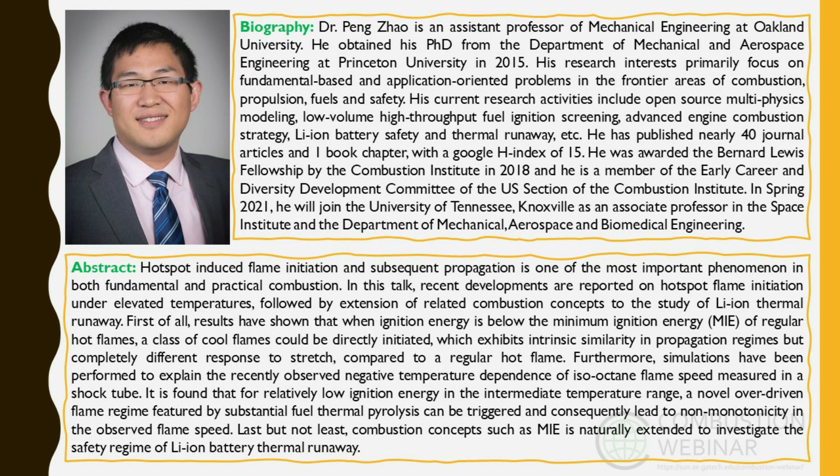So I always consider Peng as a rising star in our field and also a role model. In spring 2021, and this is good news for us, he will join the University of Tennessee, Knoxville as an associate professor in the Space Institute and the Department of Mechanical, Aerospace and Biomedical Engineering. So Peng will move and also be promoted. That's very good. And I think because of this Space Institute, he will add more research towards the aerospace direction. So let's see what Peng has for us today.

Okay, thank you very much, Dr. Yang, for the kind introduction. Dear colleagues and friends, it's really a great pleasure for me to introduce to you my recent research on hotspot flame initiation, as well as lithium-ion battery thermal runaway. In the beginning, I want to give a brief introduction saying why this problem is important and what are the fundamental concepts I want to briefly review.

Basically, in power cycles and propulsion systems, combustion frequently needs to be triggered at the desired timing of each cycle. Such active combustion control is frequently realized using the spark plug or the laser ignition system. During this process, you will have the ignition energy stored in the ignition coil or the laser pulse deposited locally in a short duration of time, leading to subsequent thermal and chemical change in the mixture. And in other cases, due to the heat transfer with a wall or imperfect mixing, pre-ignition knock may occur due to ignition from a hotspot.

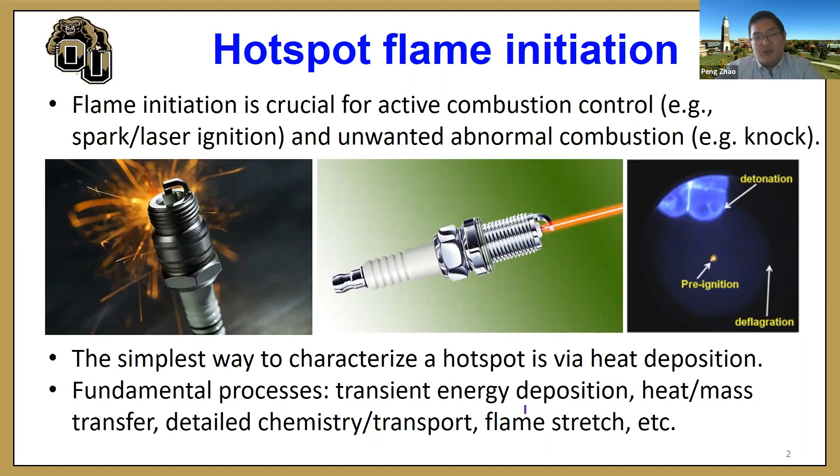So a very simple way to model this class of phenomena is through the problem of hotspot ignition, where a hotspot is characterized by the heat deposition by imposing a heat source term or an initial temperature profile. Although complexities such as electromagnetic waves, shock waves and plasma ionization are sometimes ignored, the crucial fundamental processes, including the transient energy deposition, heat and mass transfer, detailed chemistry, transport, and flame stretch are accounted for.

On the other hand, as reviewed in the lecture from Professor Egolfopoulos a couple of weeks ago, by surveying hundreds of recent combustion literatures, he found that the majority of laboratory flame experiments are conducted under ambient or only slightly elevated temperatures. However, in practical systems such as piston engines, gas turbines, and scramjet engines, you have the unburned mixture being compressed by either the piston motion, flame dynamics, the compressor, or a sequence of shock waves, such that there's a substantial mismatch in the thermodynamic conditions of the unburned mixture.

So that will lead to gaps in understanding of flame dynamics and chemistry, and that will lead to missing novel physics and combustion features. So that's why I want to talk about flame initiation problems under elevated temperature conditions.

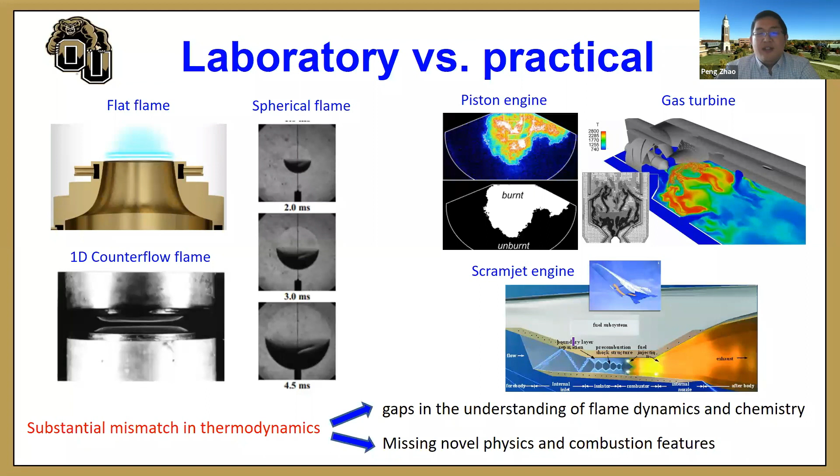So before I continue, I want to review two major important concepts for the hotspot ignition problem. The first one is minimum ignition energy, which measures the critical ignition energy needed to successfully trigger a self-sustained flame. The left-hand side shows experimental data on n-butane/air. You can see that when the ignition energy is low, the flame kernel basically cannot be initiated. With gradually increasing ignition energy, we can successfully initiate a flame.

And the right-hand side is a simulation on hydrogen-oxygen mixtures, which basically shows the same thing. There exists a critical ignition energy above which you can successfully trigger a flame. So there are many analytical solutions and even scaling laws on the minimum ignition energy in the textbooks and literature.

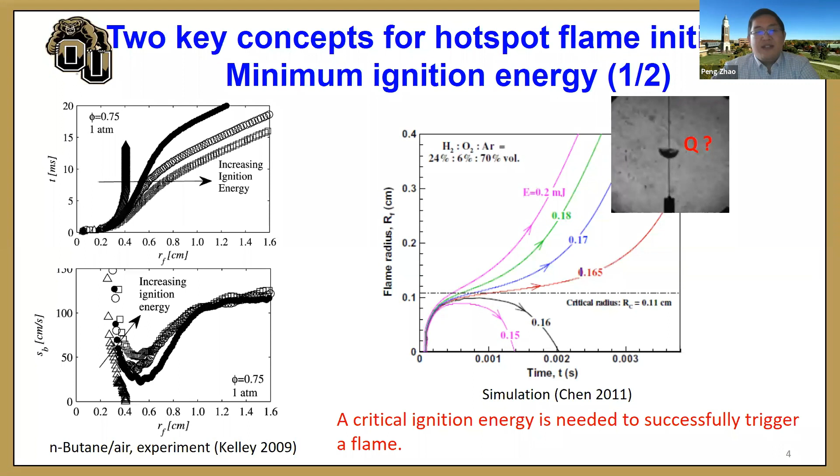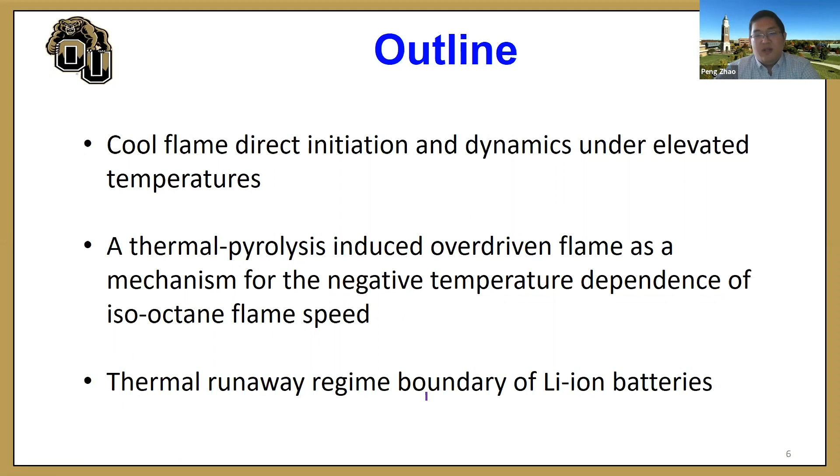So with these 2 fundamental concepts in mind, I'm going to show the outline of today's talk. The first story I'm going to talk about is cool flame direct initiation. The focus is on the minimum ignition energy and flame regimes, as well as the stretch dependence of cool flames. The second focuses on the recently observed negative temperature dependence of iso-octane flame speed under high temperatures as measured in a shock tube at Stanford. And by performing unsteady simulations, we can explain that negative temperature dependence by observing a thermal pyrolysis induced overdriven flame. In the third part, I'm going to show how I extended the hotspot ignition phenomena and concepts to the study of the thermal runaway ignition regime of lithium-ion batteries.

So the first part, cool flame direct initiation. The simulation is performed using an open source reacting flow platform based on OpenFOAM. And the fuel we select is dimethyl ether, one of the simplest fuels including low temperature kinetics. Under ambient temperature 300 Kelvin and 1 atm, the flame initiation process is largely similar to the hydrogen case we have just shown. You have either a successful initiation of a hot flame or an ignition failure.

However, when we increase the ambient temperature from 300 Kelvin to 600 Kelvin, although we can still have a hot flame at a very large ignition energy and ignition failure at low ignition energy, in between there is a range of ignition energy which gives you a cool flame, with a much milder flame radius evolution rate.

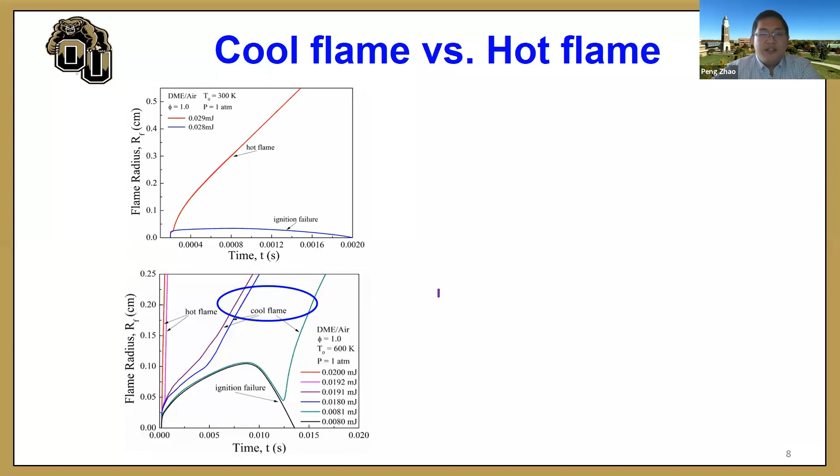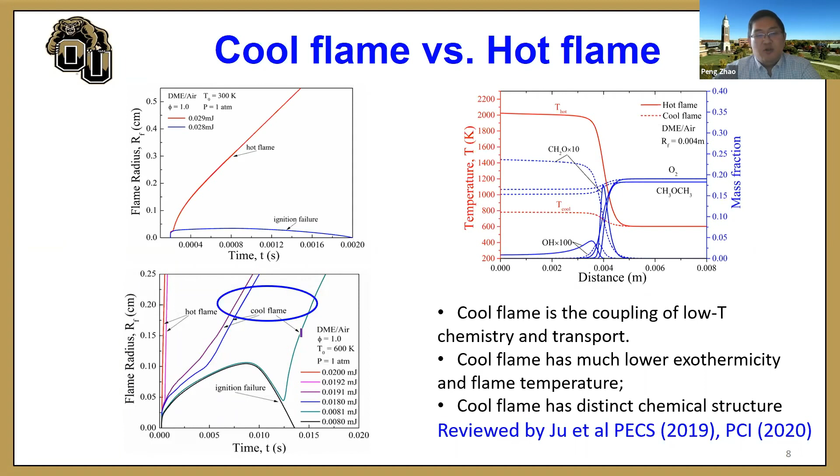So if we trace the minimum ignition energy needed to initiate a cool flame, we find that the cool flame can only be initiated in this low to intermediate temperature peninsula, and the cool flame can be initiated with a much lower ignition energy compared with a hot flame for the same mixture. Also, a cool flame can be initiated over a much wider equivalence ratio range. This is consistent with the extended flammability limits of cool flames as identified by Liang and Law using the turning point of premixed flames.

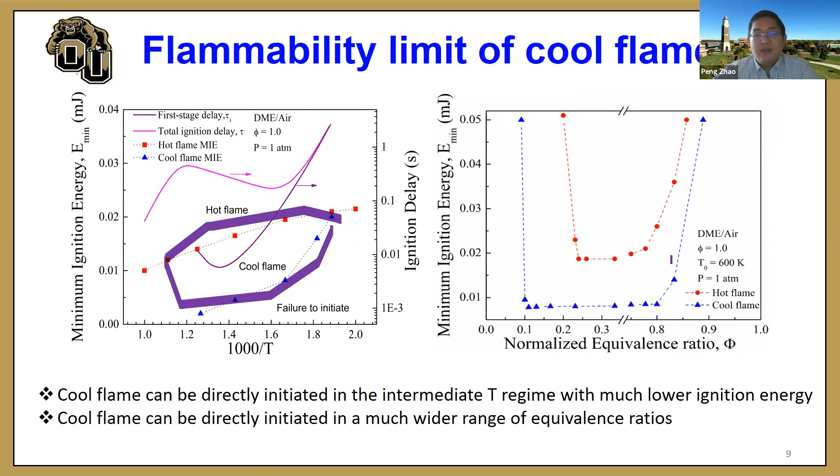Although with the similarities in the flame initiation regimes, there is a substantial difference in the cool and hot flame response to stretch. So following the classical theory of stretched flames, the flame stretch induced by flow non-uniformity and flame curvature will couple with a non-equal diffusion of heat and chemical species, basically manifested as non-unity Lewis number. And this coupled effect of flame stretch and Lewis number can affect the burning intensity of the flame.

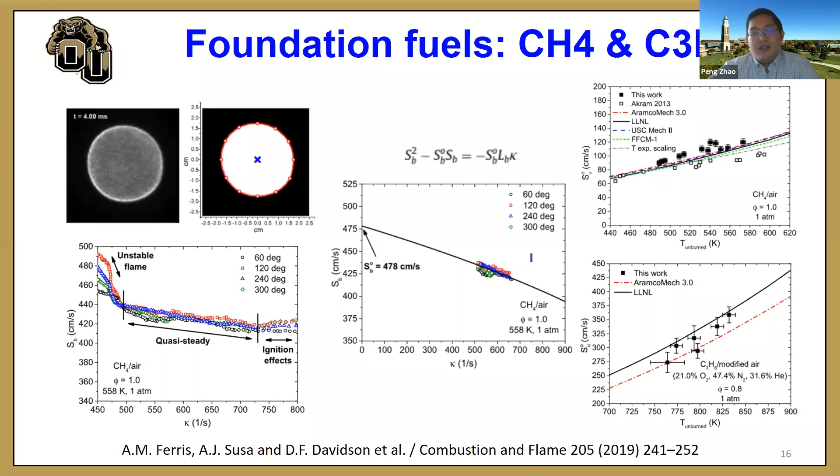However, in the intermediate temperature range around 750 kelvins, they have found a negative temperature dependence. Well, one direct conjecture might be, okay, this is similar to the NTC effect in the ignition process, where the ignition delay shows the NTC behavior.

But if you compare the ignition timing versus the flame measurement time, you can find that the ignition delay, even the first stage ignition delay, is at least 2 orders of magnitude higher compared with the flame measurement time. What it means is that during the flame propagation time, the unburned mixture is hardly affected by any auto-ignition chemical reaction progress. Or in other words, it's chemically frozen.

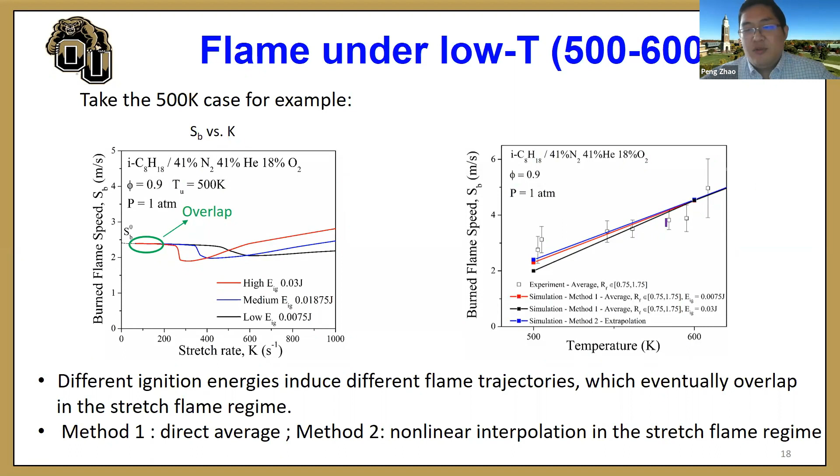Similar things happen for the high temperature conditions, where regardless of ignition energy, regardless of method 1 or method 2, you have pretty consistent results and good agreement with the experiment.

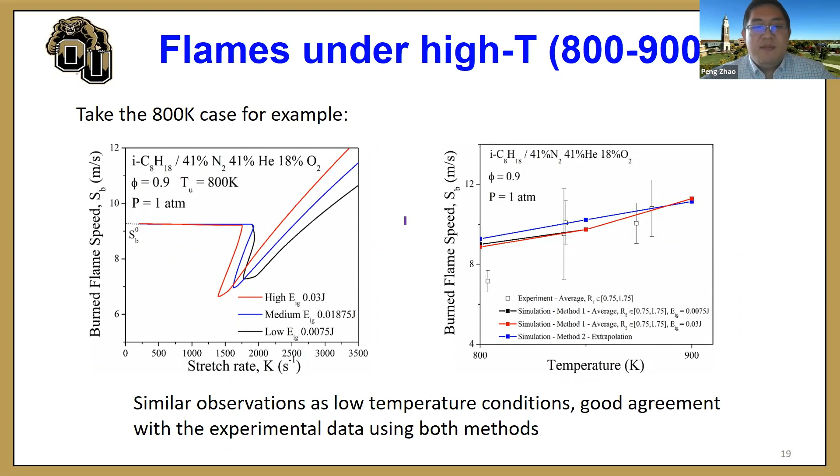The strange thing occurs in the intermediate temperature range, where with a high ignition energy case, the evolution process is pretty normal. However, with a low and a medium ignition energy, you will see a sudden flame acceleration in the beginning. That leads to a huge bump in the flame speed, which decays back to the regular stretch flame dynamics regime and merges with a regular flame structure in a while. And eventually, all these flame branches merge in a stretch flame dynamics regime as expected.

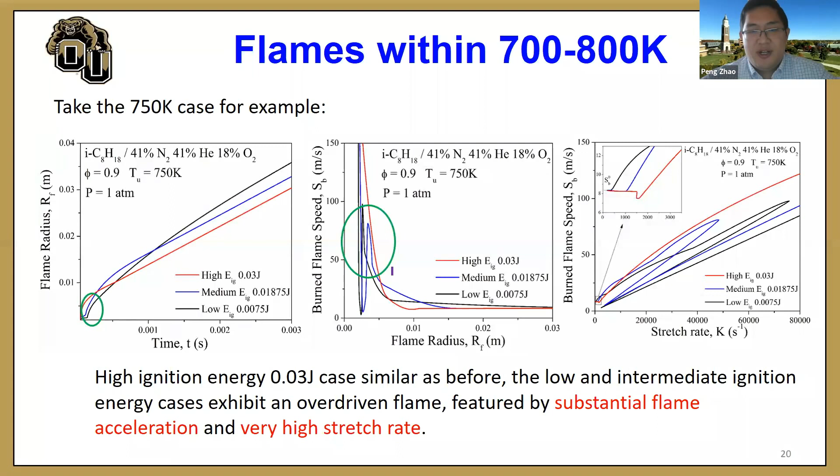However, this overdriven flame segment during the flame initiation process will affect the result if you directly average the flame speed in a certain radius range. So as shown here, if you use method 1, still averaging the flame speed within 0.75 to 1.75 centimeter using a low ignition energy, you can successfully capture the NTC, the negative temperature dependence of the flame speed.

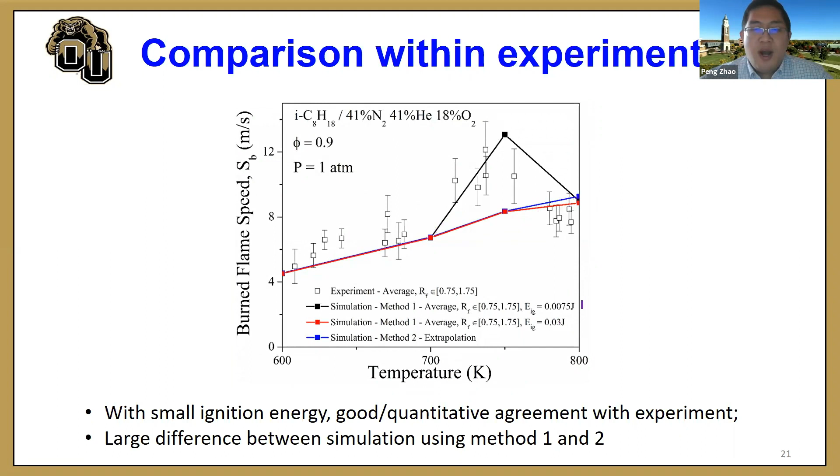However, if you use method 1 but with a higher ignition energy case, since there is no overdriven flame, the trend exhibited in the experiment is not captured. Right? And similar thing for the extrapolation, we can only have monotonicity in the flame speed. So next question is, what is this overdriven flame? What causes this overdriven flame?

That implies this is a thermal pyrolysis or thermal decomposition process, which subsequently generates a lot of C1 to C4 fragments. And these C1 to C4 fragments at a certain point tend to autoignite, leading to a much steeper reaction region with a much steeper temperature gradient. And this is the flame of the CO and C1 to C4 fragments, which tends to propagate faster and swallows the milder reaction zone segment controlled by fuel pyrolysis.

And this flame structure, of course, is unstable because this segment propagates much faster, and eventually it will take a few moments to approach the regular flame structure. And that causes the overdriven flame.

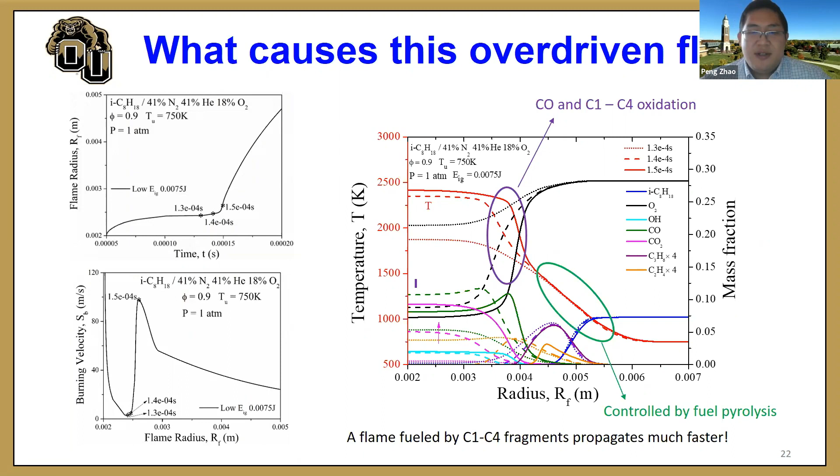And at higher temperature conditions, although your fuel pyrolysis is favored, your flame initiation is much easier and much faster. So therefore, there's no sufficient time allowed for this overdriven flame to occur. More detailed results of this work are reported in our collaboration with Professor Chen from Peking University and Professor Hanson from Stanford in this Combustion and Flame paper.

And this work, to summarize it, we have performed time scale and chemistry analysis to show that the observed non-monotonic behavior of high temperature iso-octane flame propagation is irrelevant to the low temperature chemical kinetics and autoignition chemistry. And we also found that in the intermediate temperature range with lower ignition energy, we can actually have a fuel pyrolysis induced overdriven flame, and such an overdriven flame can well describe the negative temperature dependence of the experiment.

So in the third part, I want to talk about how we, as combustion scientists, can extend the phenomena and the concepts of flame initiation to study lithium-ion battery thermal runaway. Because in recent years, I receive more and more questions from my students: as we major in combustion, do we have a future if the future ground transportation is full electric?

So I told them the answer is yes, because there are lots of challenges even in battery research, and some of the challenges require a solution from the combustion community. So when I say challenges, it actually means opportunities. I think there are at least 4 different challenges of battery research.

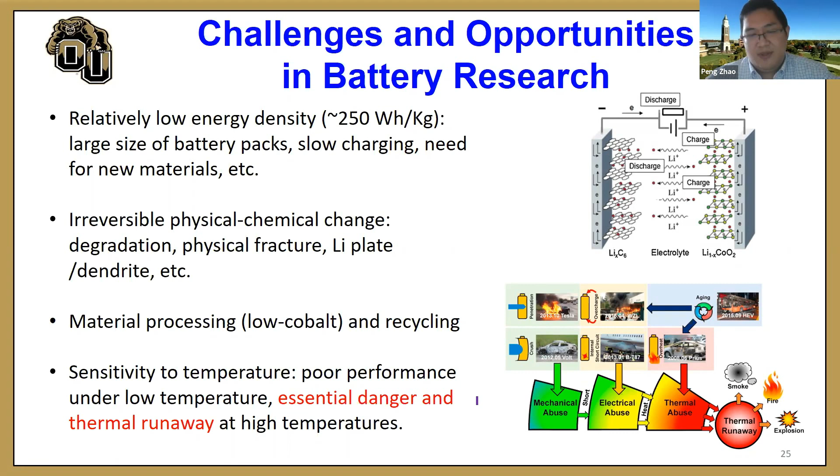And this is a part that I think as a combustion community we can contribute. I would consider this a combustion problem. As reviewed in this table, you can see that most electric vehicle or plane accidents are actually caused by internal short circuit or external short circuit of lithium-ion batteries. And what happens in such a process is basically the short circuit tends to create a hotspot within a battery pack. That hotspot tends to trigger some unwanted reactions on the battery material, including the electrode and the electrolyte. Right?

So as inspired by hotspot ignition from combustion research, I'm going to raise 2 questions. The first question is, what is the threshold condition and the kinetic feature of thermal runaway? Second question, during a typical internal short circuit scenario, what is the heat release rate? Is that going to satisfy that critical condition for thermal runaway?

All right. So by drawing an analogy to the hotspot ignition of flames, we can actually build a model to describe the thermal runaway of lithium-ion batteries. And compared with combustion chemical kinetics, you can see that the chemical reactions in battery thermal runaway are still in the infant stage, where we use very global heat source terms to describe some semi-global reactions, like 4 reactions: SEI decomposition, reactions between the anode and the electrolyte, reactions between the cathode and electrolyte, and the electrolyte decomposition reactions. And these reactions include many parameters to be determined from TGA, DSC, or ARC experiments.

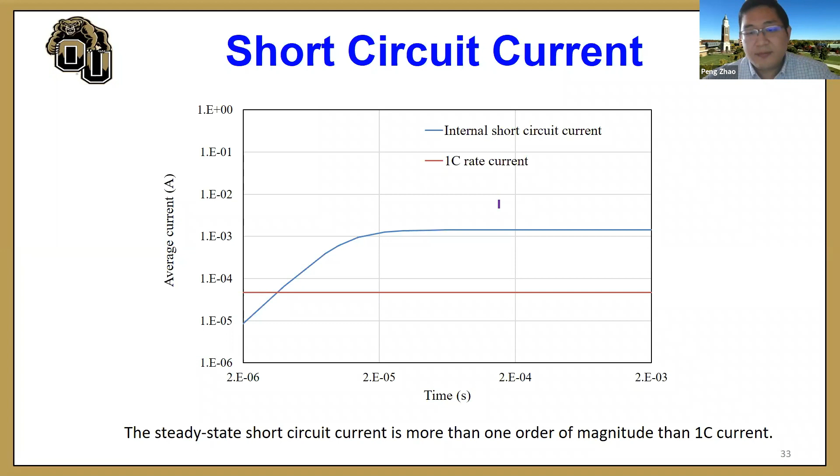And what we found is that during a typical internal short circuit, the current can be 1 order of magnitude higher than the 1C rate current, which is the current corresponding to full charge in 1 hour. And we have also shown that in the beginning of the internal short circuit, the maximum heat release comes from that piece of metal. After that, the maximum heat release comes from the non-particle intercalating regions at either side of that piece of metal.

And we also compare different battery materials. We found that lithium iron phosphate, under the same condition, can actually have the lowest temperature rise during an internal short circuit. So that means this lithium iron phosphate battery has a potential to be safer. Okay.

So this is a summary of the third part, a useful trial to extend our knowledge and methods from combustion to study hotspot ignition in lithium-ion batteries, where we identify the critical condition for thermal runaway. And using methods like heat release rate analysis and sensitivity analysis, we can identify the key reactions and key parameters in the models. Right. More details of this research can be found in our recent paper in Applied Energy.

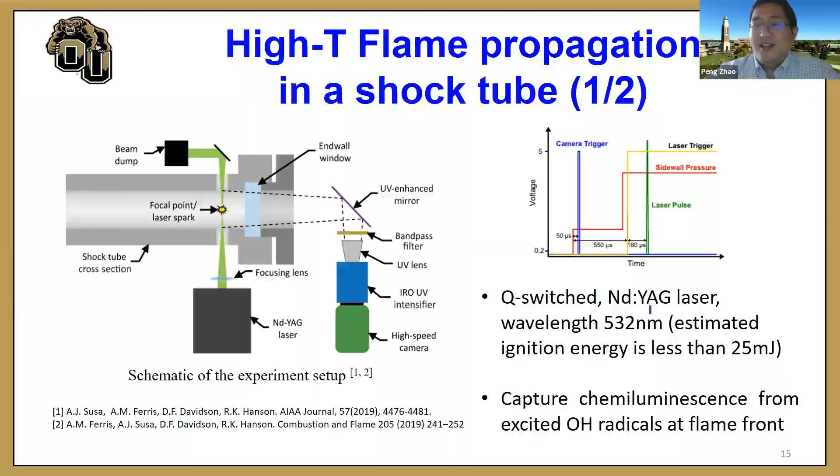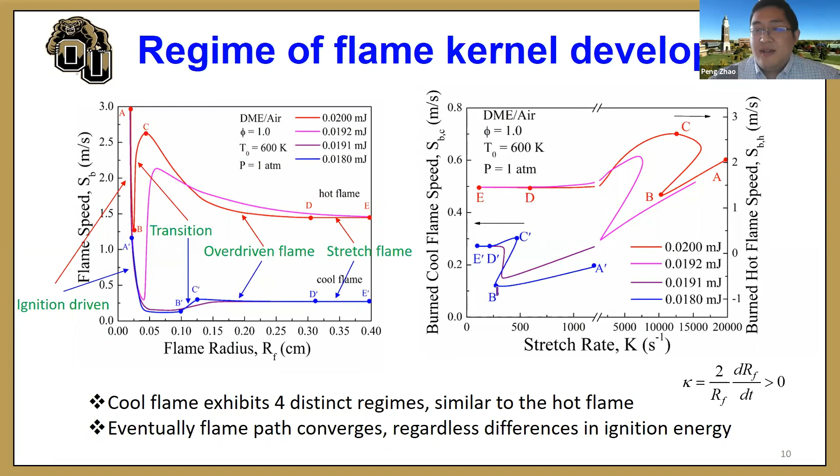I think it will be very helpful guidance to the community if you could predict when such regimes, as you have shown for DME, would happen for just any fuel. Right, exactly. How much the fuel kinetics, let's say you have isobutane, or propene or iso-octane or neopentane or whatever, if the magnitude of the expected kinetics in the low temperature regime will be shown to have a significant or less significant effect. And then also how the boundary conditions of your flame and the homogeneity of your reactor, size and so on, would play into these regimes. So it would be helpful if you could give a more systematic assessment.

Yes, definitely in the future, we can extend this research to fuels from different classes with different low temperature reactivities. And we are also going to investigate the phenomenon under different thermodynamic conditions, because there is a very important time scale comparison within these conditions: flame initiation time versus the ignition delay time, right?

So for the iso-octane case, for example, the ignition delay is pretty long, so you can have these overdriven kinds of flames being initiated. Didn't see a cool flame in that range. But for n-heptane, as shown in the recent measurement from Professor Hanson's group and a collaboration work with Professor Zhao, they have shown the cool flame assisted hot flame, basically a double flame, right?

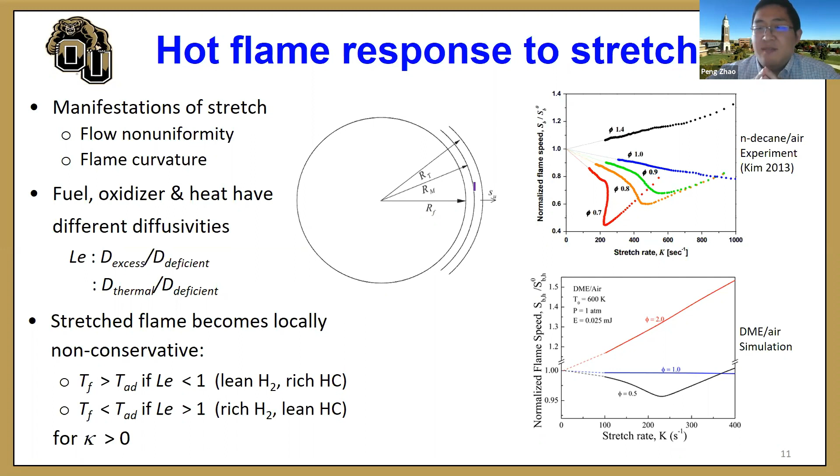Okay, the next question from Professor Zhu: if you truncate the low temperature chemistry, how is the pyrolysis-driven flame speed affected? That's a great question. We actually didn't try that, but because we directly simulate, there is no low temperature chemistry; although our mechanism does have low temperature chemistry, it doesn't actually manifest. I think the time scale comparison clearly explains that, because your low temperature chemistry is very unreactive. It takes 2 orders of magnitude

time to show itself. That's actually a very interesting thing, because if I increase the pressure, I can make these 2 time scales closer. So it's possible that we can have mixed flame regimes. And if you think that thermal pyrolysis and cool flames are competing pathways, I think there can be very interesting competitions there.

Peng, I just want to comment that what we recently found is that because of the low temperature chemistry, you have 2 or 3 oxygen additions to the molecules. Your reaction rate actually is proportional to the square or even the cube of the oxygen concentration. So if you get high pressure at oxygen-rich conditions, your low temperature chemistry can compete with pyrolysis. That would be very interesting. We can work together to get a paper on that. That's very interesting. Yes. So Peng, how high a pressure do you think you need for these two to come together at the same time scale?

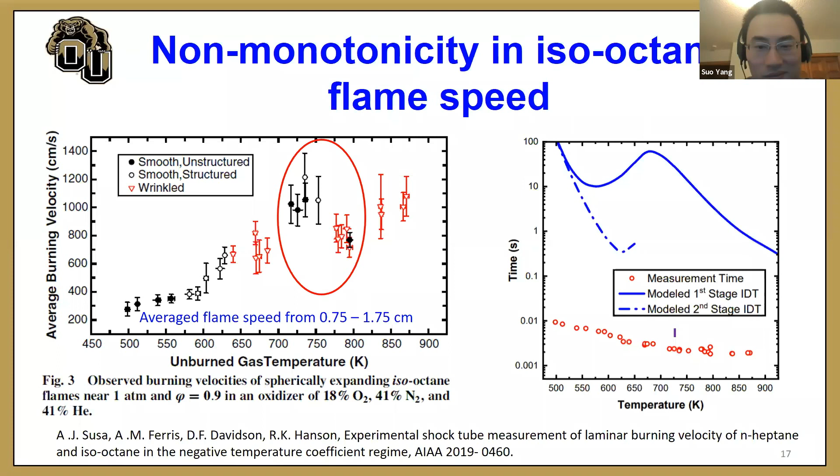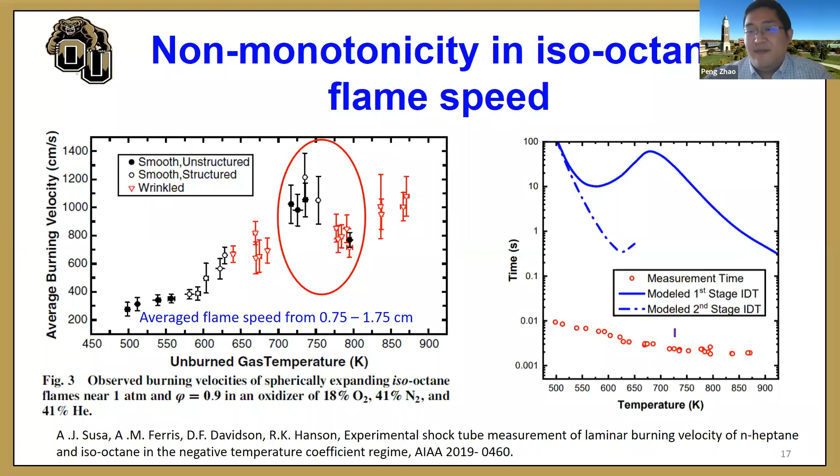Yeah. This, of course, depends on the fuel and on the ignition energy, because a lower or intermediate ignition energy gives you a longer flame initiation time. And there are knobs to tune both fuel reactivity and the flame evolution time. So there can be some very interesting phenomena, I suspect. And also, if you think about Professor Zhou's simulation on the double flame, I suspect under certain conditions we can have a more complete regime with cool flame, thermal pyrolysis induced overdriven flame, or auto-ignition assisted flame. That will be even more interesting.

Okay. The next one, again from Katharina, about your battery study. Do you have numbers on actual thermal problems for current generation lithium batteries? What is the fraction of encountered problems? You showed data up to 2016, and I was just wondering whether the known problems have been fixed, whether the battery architecture has already taken care of some of the issues that would lead to hotspots, by the electrochemistry community, and whether the fraction has dropped with certain manipulations in the battery.

So definitely, because in our modeling, the boundary condition we put is adiabatic. In real battery electric vehicles, you have the cooling system.

And not only will the cooling system give you a much more homogeneous temperature within the cells, but also in the case of one battery thermal runaway explosion, the coolant might help to prevent the propagation of thermal runaway among different cells. That does help a lot, but still, there can be extreme cases like collision or penetration.

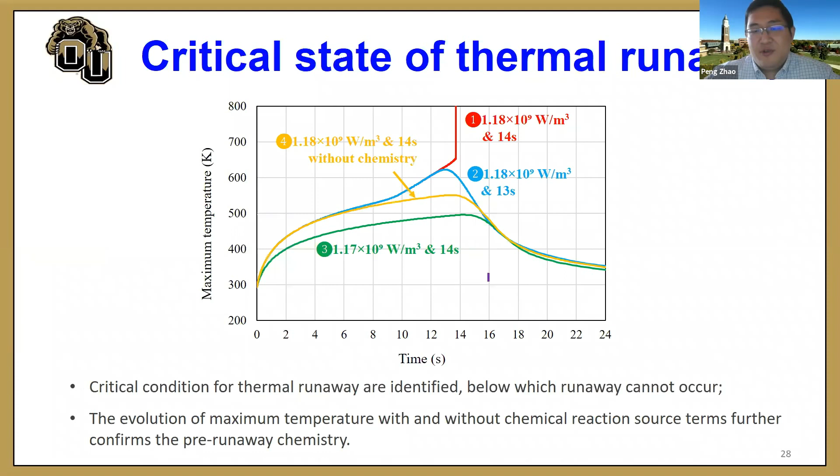So from the triggering of the thermal runaway reactions, you can say that SEI decomposition occurs first. Once the SEI is decomposed, then you can have the direct contact of electrode and electrolyte that triggers the subsequent reactions. That's kind of my understanding based on this simple model.

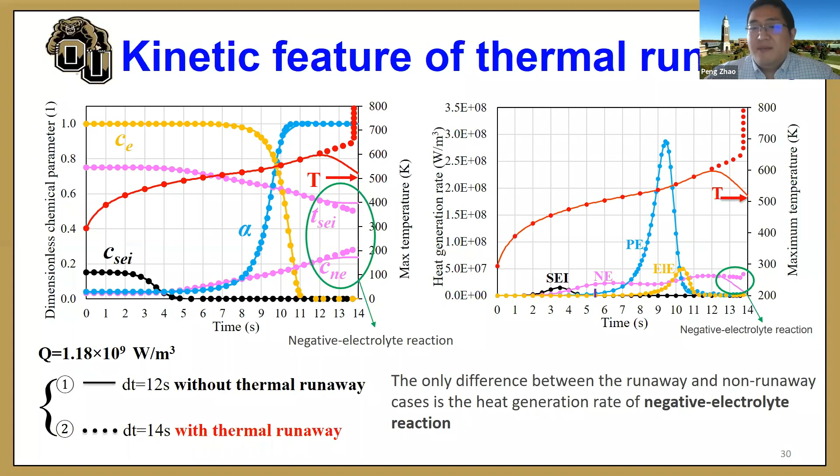And the next one from Wang Han. He has a question regarding minimum ignition energy of cool flame initiation. So he said, as you know, Professor Law's group found that at certain conditions, turbulence can facilitate forced ignition of mixtures with a large Lewis number. Can you give some comments on the turbulence effect on cool flame initiation by a hotspot?

That's a great question. I haven't done things on that part, but I would suspect that it really depends on your turbulent intensity. And turbulent cool flames, I guess Professor Michael Mueller and one student are working on that. You might check. That's kind of the only work I know about turbulent cool flames. Other than that, I didn't see much work in that field, probably because once you have fluctuations, disturbance from the turbulence, it might break the cool flame structure. That of course depends on your turbulent combustion regime. But I have to say that is a primary reason why we haven't seen much work in that field.

Kaoru Maruta, regarding battery analysis, will there be similar behaviors expected in DMC and DEC? That's dimethyl carbonate and diethyl carbonate. The electrolyte really matters for thermal runaway. You want to control the reaction between the electrolyte and the electrode in the thermal runaway. Also, the electrolyte itself can decompose, releasing different gases. And that's also one of the major reasons that people are talking about solid state batteries, because solid state batteries perhaps won't have such a problem.

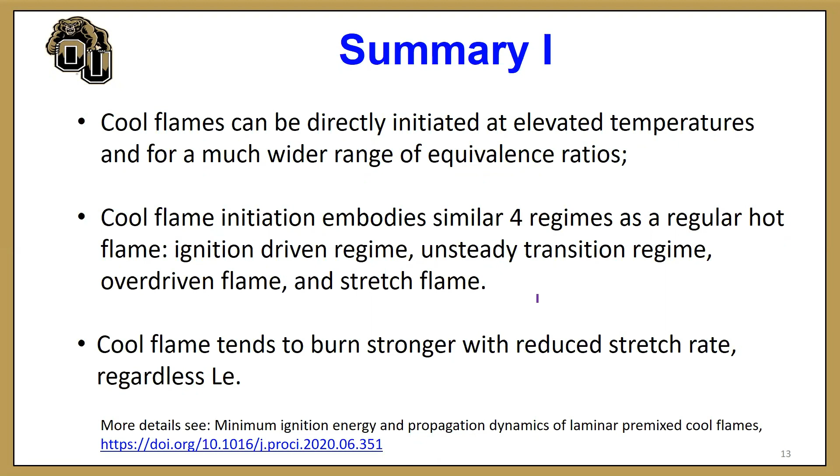Yeah, I think the similarity with DME is the oxygen in the fuel. So probably my question should be converted into something like: any effect of the small difference in the low temperature chemistry of the fuel? Does such a small difference affect the results of the analysis? I'm sure it will quantitatively affect results, but for the method and concept, it won't.